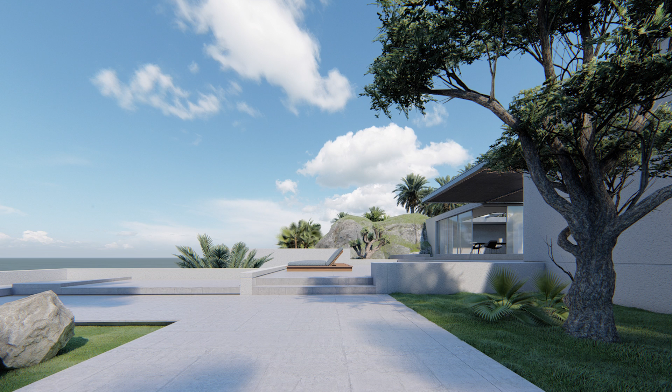So this is the final image, and it was really honestly very quick to make. I think this was 2-3 hours from not understanding much about Lumion to getting here.

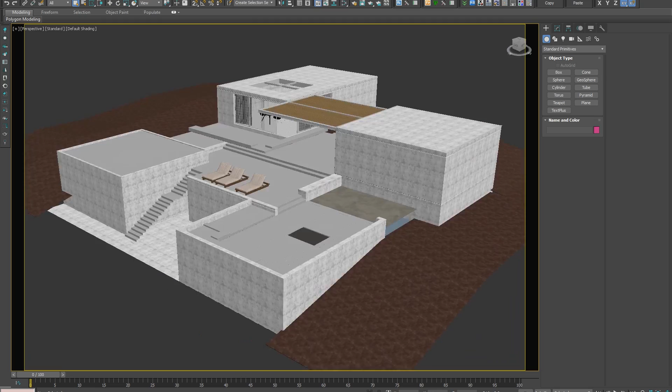Okay guys, so here we are with our 3D model, and this one was done in 3ds Max, and again you can use SketchUp, really whatever 3D program you prefer. Great thing about Lumion is that you can actually bring in the 3ds Max model directly into Lumion.

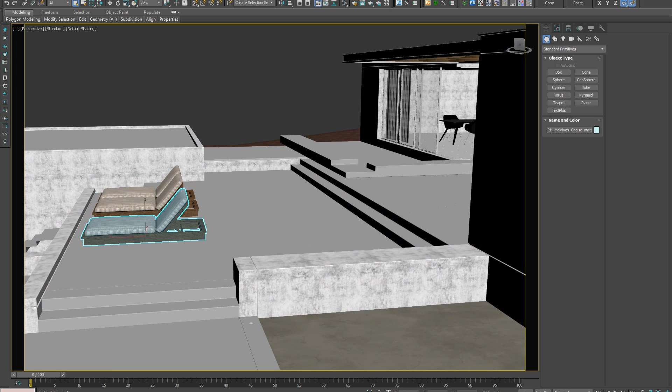This was modeled by one of our team members, Danny, and it's just a very simple model, and we knew where we wanted the cameras to be, so we didn't really go into too much modeling too extensively, and we've just put in our simple furniture because I think Lumion's library is not great.

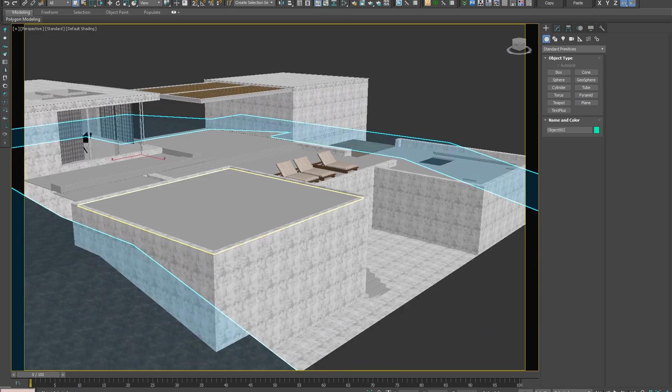From what I've seen online, I've seen some really nice tutorials as well in regards to Lumion. Everyone tends to bring in their own furnishing, so if you have any problems with the surfaces and they're not showing up, just shell them, and I find that brings them in. We also separate it out by materials. I know SketchUp can do that, and pretty much all other programs, and basically Lumion just interprets those.

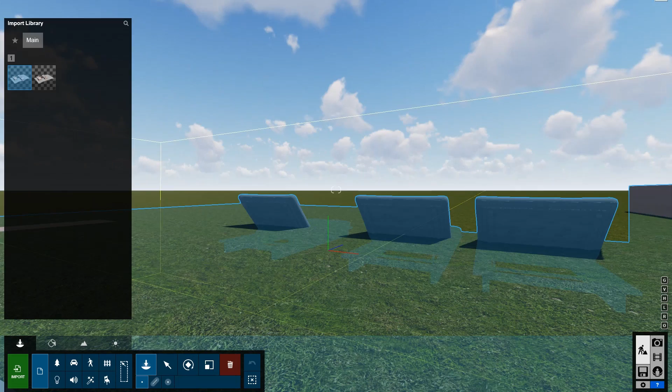So let's kick this off into Lumion. So here goes, and we've started our Lumion project, and we've basically brought in our model.

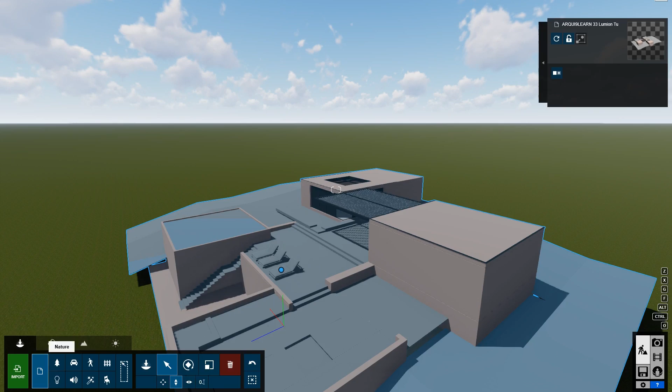I'm going to be narrating a little bit of this, then I'm going to be making some pauses, and you can just enjoy the process. This one we haven't actually sped up too much, so you should be able to see how everything works. Please keep in mind, this is also a learning process here with what we were doing, and when I was trying to learn this, but it's so quick and intuitive that you really start to understand.

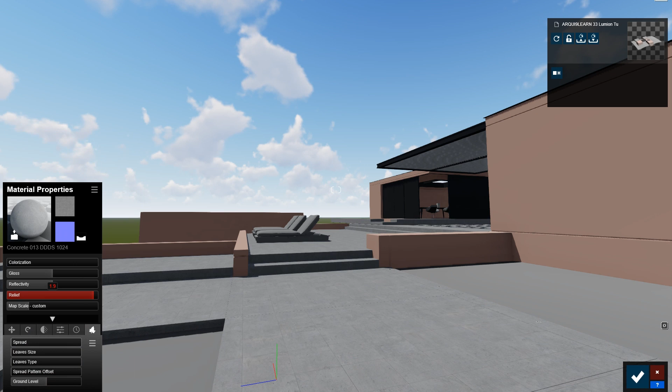Now, as you can see, I've delved in straight away into just getting the basic materials. This is very similar to the workflow of any project that we work on. So we'll start with our basic materials, just getting everything set up. Now, I knew already more or less where the camera was coming from, so I knew it was about this direction.

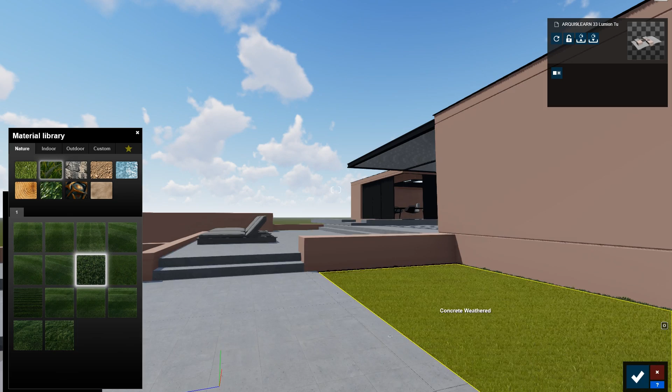And I'm just getting into understanding what is what, your basic grass, your basic concrete, stucco, things like that. It's so quick and intuitive just to choose those materials. Again, Lumion is divided in such an easy way where it has the materials, it has the environment, and it has the lighting. You'll see as we go through that.

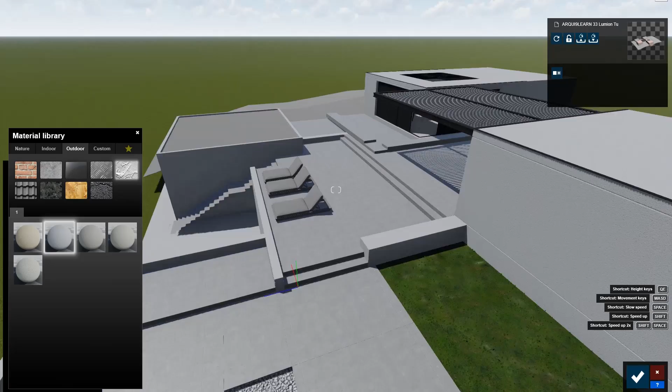So again, just testing out a little bit of what materials should go where. Again, this was a very open brief, and I was trying to understand it as I went along. I thought this could be kind of a rock pool where we'd have some flames coming through. I really just wanted to make something quite pure, white, and essential. It really didn't go too complex, and we wanted to see how photographic we could really get it to be.

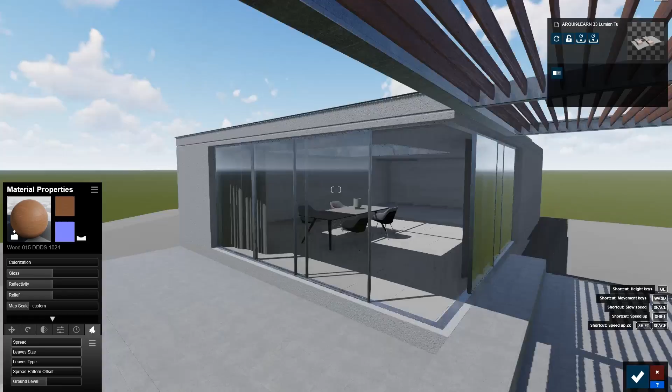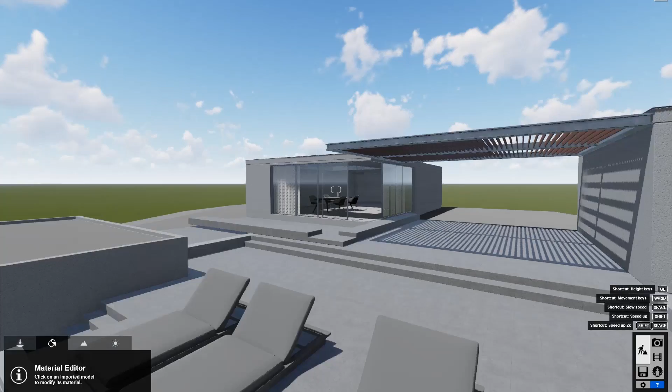So another great thing about Lumion is the capacity to basically see what you're doing straight away. You really get a feel for where the light is coming, how the light is going to be, how the textures are going to react, how the reflections are going to react. And especially in this latest version, 9.02, it's fantastic because you can really get global illumination, where in the shadows you have light that reflects off walls and things like that. It's really amazing to see straight away what you're doing.

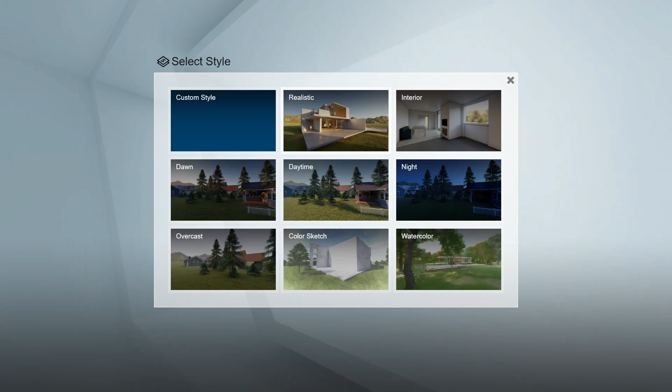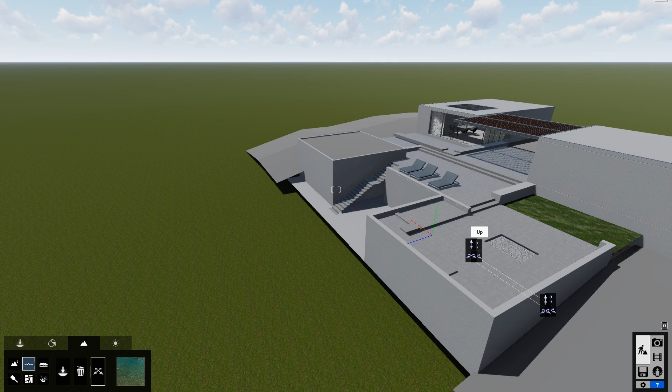The way that we've used it, and the way I'm using it at the moment, is just to work as a rendering engine basically—bringing in everything, but it textures and lights and does everything else. It's super simplistic. You saw we just went to the camera symbol, clicked on realistic, and it already sets everything up. That controls the camera, so your cameras are then stored there.

Now I'm just trying to understand how water reacts, and you can draw your own pools, or if you don't have a water plane. It looks really nice—water is something that's super hard to achieve really well, and I think in these real-time engines it doesn't look bad at all. You get the caustics, that filtering of light through the water where you see those ripples.

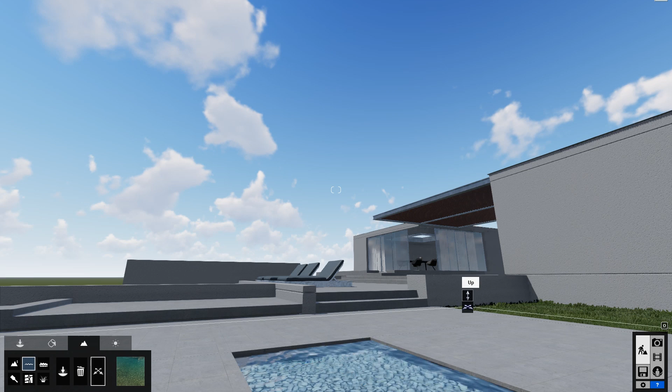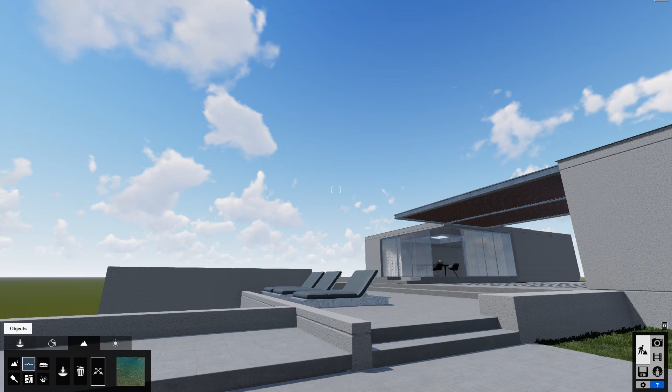As I went along, I was just saving various works in progress, and you see you can also render super quick. The one thing about Lumion is you really have to have a strong, really good graphics card, a good processor, and a lot of RAM. I think we're using a 1080 Ti, GTX Ti, on this, so it's super quick and runs really well. But yeah, it is super intensive.

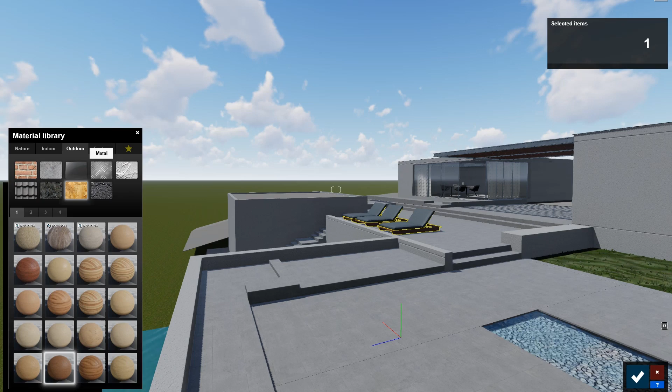So again, just sorting through all the materials, trying to get that balance of all the materials working, and testing out that water. In the end, I saw it really didn't work.

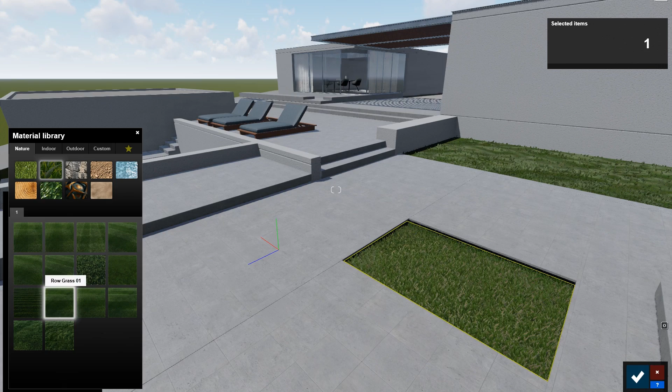The controls are kind of just like a video game—W to go forward, S to go back, A to go left, D to go right, and then you can go up and down with Q and E. It really just reminds me of playing a video game, which is great.

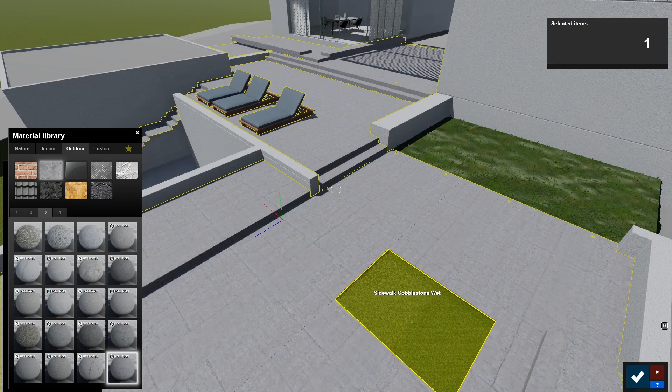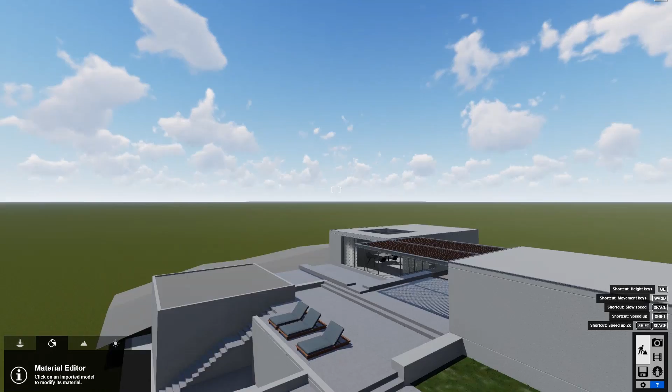It's so fast and intuitive, and you can adjust the textures. Once you select, you go into your texture tab and just select the geometry. Again, it groups everything from Max that has the same texture, and you just double click the material and it applies to what you're using. Then you can adjust the roughness, the reflection. It's really quick and intuitive—honestly, it's such a breeze.

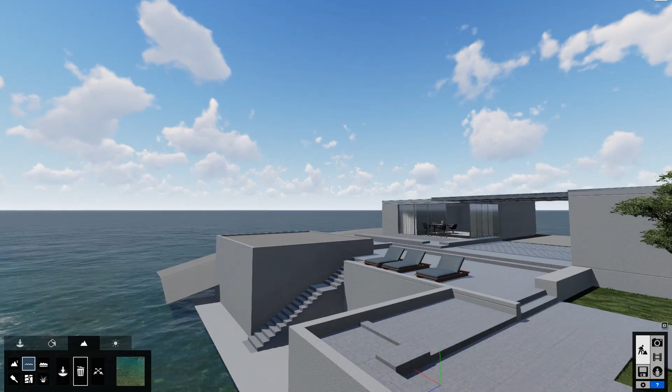And now just going into the entourage. This is the next step where we start to look into the entourage and figure out what's going on with the environment around. I switched that to water, and it just looks amazing. It's not so much about this being a deserted island, but I wanted to test and see how it looked and develop all these environmental things. As I more or less knew the camera we were going to have, I didn't worry too much about it. Now just experimenting around—are we going to make it sand or not? I think I kept it sand for the time being.

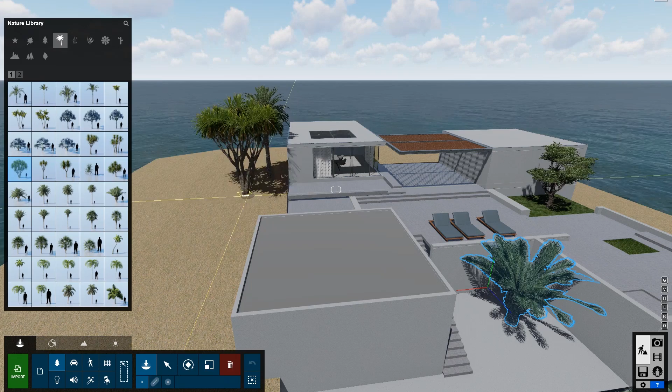Then I think the trees are one of the greatest things about Lumion, especially if you're an architect and just want to quickly populate something. It's fantastic—you can really get that diversity, and I think they look great when you render them. Again, in post you can always add a mix of both post-produced 2D trees and 3D trees.

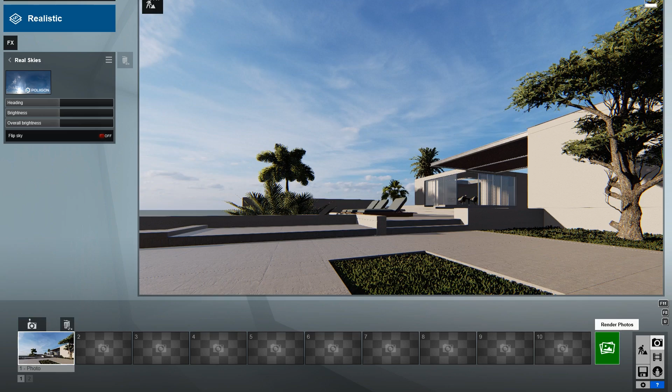And then, as you can see, I'm experimenting around with the lights. Now you have this thing called Real Skies, which has Poliigon skies, and they're absolutely amazing—it just makes the image look very photorealistic.

You can see the shadows, the color, everything is really nicely done. You can even go into dusk shots, and at one stage I really start to experiment with that. It's just great, you can see already it's coming out super well.

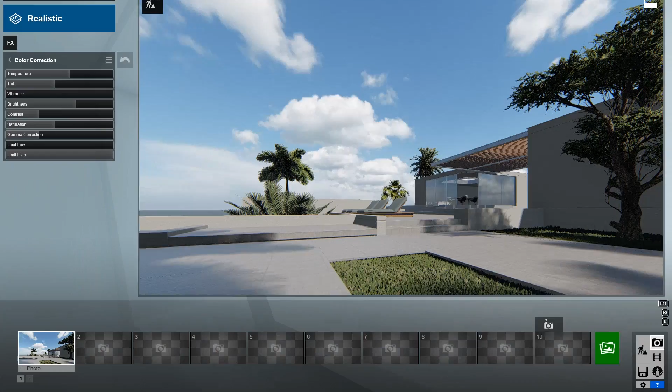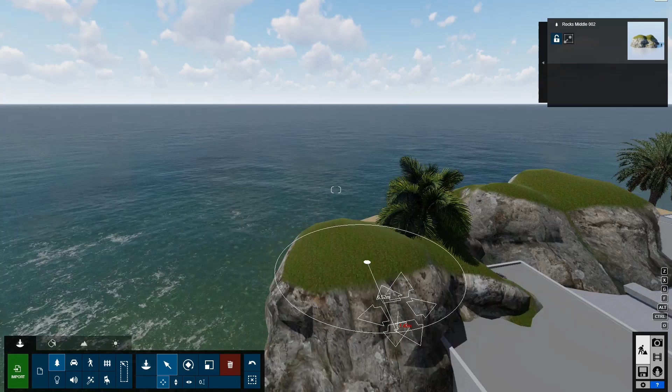I don't have much experience in this, so I'm just testing out all these various things, the library, the entourage, the textures, the lighting, and it's hyper quick. Even these small mountain blobs, let's call them blobs, I'm just inserting those in and testing them.

This is, again, I love diving and everything, and surfing, everything connected to the sea, so naturally I always go to these types of subjects. I'm just adjusting these to really fit the image and get a good understanding of the composition, and just moving these objects around quickly is fantastic for that.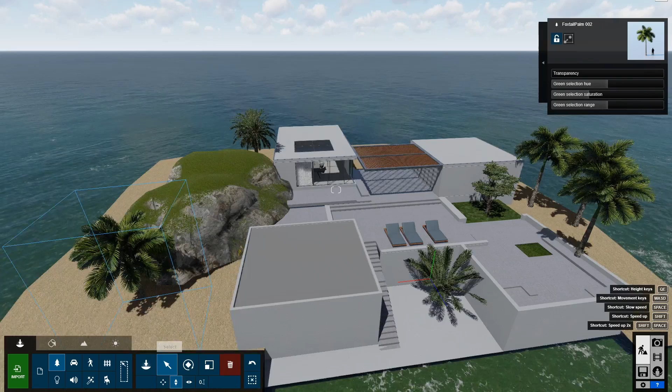I really think Lumion is a great tool, especially for architects. It won't substitute what visualizers do, because you work on a different level, huge master plans, things like that, and you need to have some flex, and there's various technical elements. It won't substitute that, but it is fantastic to get quick concepts out.

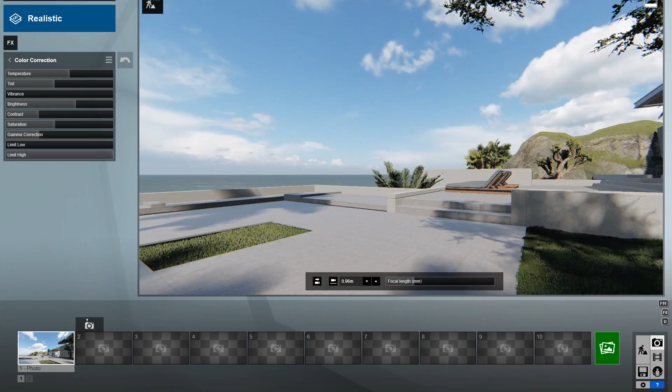Even testing the camera, you can see just how good it looks just in the main viewport. When I'm looking around in the camera with the lighting, it just looks really amazing, really fantastic. And it just kind of fills you with ideas to do quick concepts, it blew me away how fun it was.

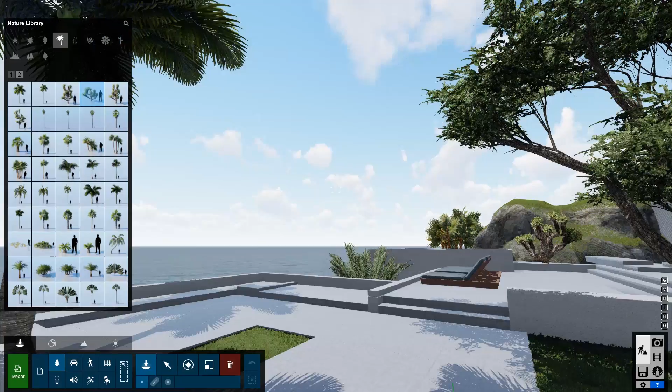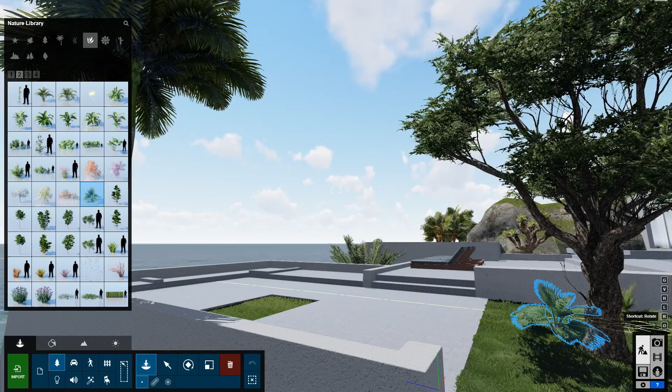Now that I've sorted more or less the entourage and the plants and the trees, they're pretty much all there, I'm just refining. But I tend to go to the next step where it's more about refining that lighting. I do try and test out a few different lightings, but I ended up just going with a simple daytime lighting to test this out quickly, and just different elements of the entourage, rocks and things like that.

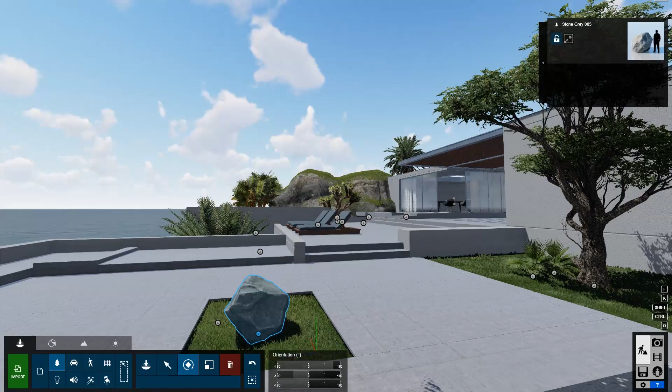And I haven't even used any scattering elements, so where you can put large surfaces and just scatter. You can just choose the surface and scatter various trees, and it will basically click and rotate those trees.

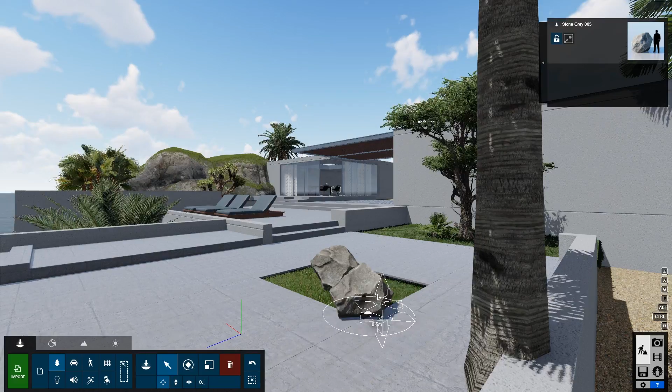On the right, if you look, when you have something selected, just above the camera symbol, on the lower right, it gives you all the shortcuts for the keyboard. And if you just hover over it, it actually tells you what it does. That's fantastic, I find that super intuitive and really nice of them to include. You've got a million shortcuts for all the programs you use and you tend to forget, so these ones really help out.

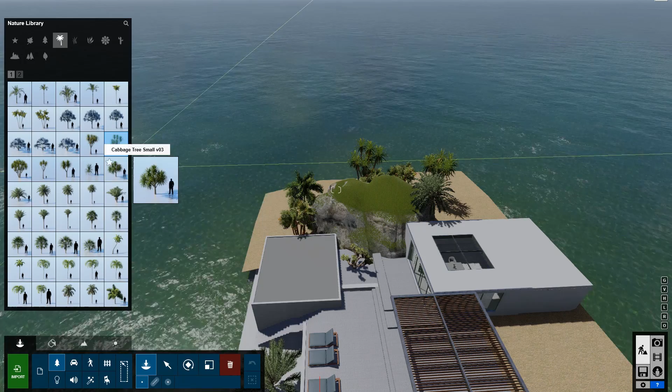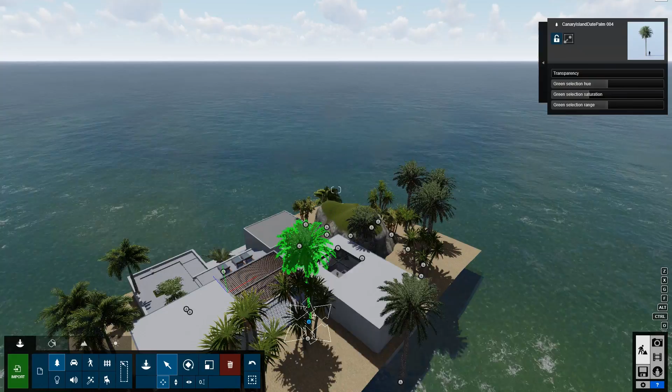Now that we're getting there pretty much, everything's coming together more or less. Again, this could be much quicker, you just have to remind yourself this was probably my second or third time using this and really looking into it, and it's just so hyper quick and intuitive.

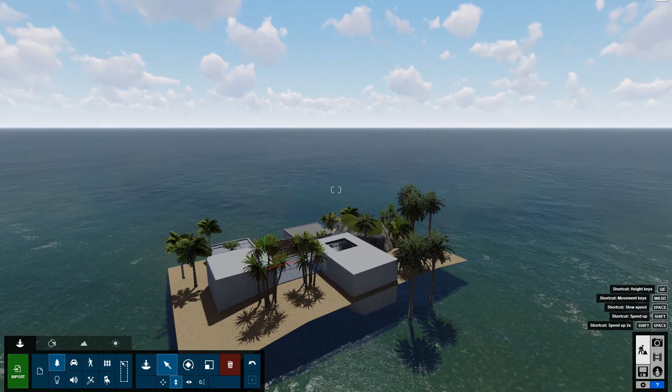Just moving things around compositionally to see how it works, if it's popping in that background. I already had the idea of what I wanted to do for the image, so it'd be a beach on the right, and I kind of thought this could be a surf villa.

Just saving out and rendering as I go along. You'll notice, yeah, once again, go to the realistic, the real skies, and I started to test out some different types of moods, trying to understand different types of lighting.

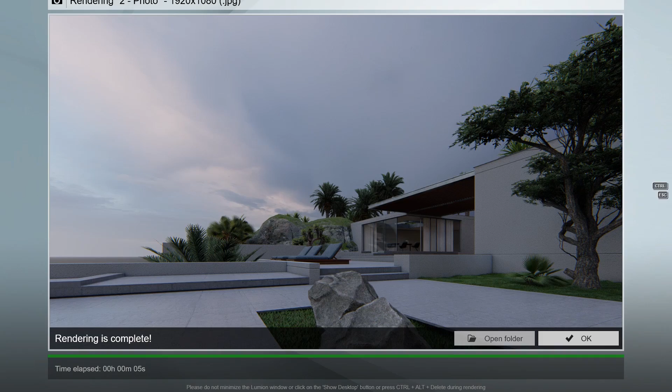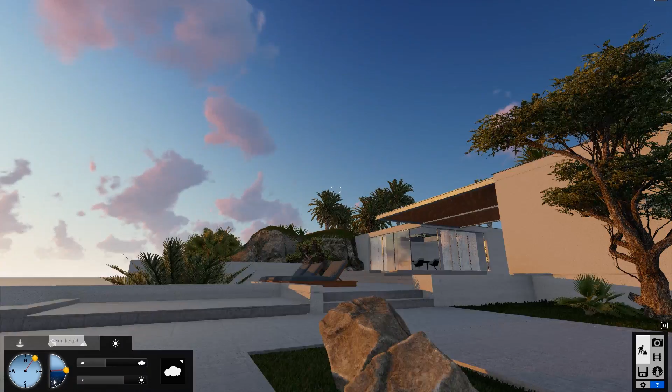Now, I really feel that the lighting is great, but I feel that it's very contrasty. And I feel like, at least in the trees and things like that, you should be able to add a little more reflection so it doesn't go so dark, because there's a big contrast between light and dark. I think in 3D programs you have this global illumination, so you have the sky, and you can kind of pump that up, at least in Corona, so you don't get such dark contrasty things.

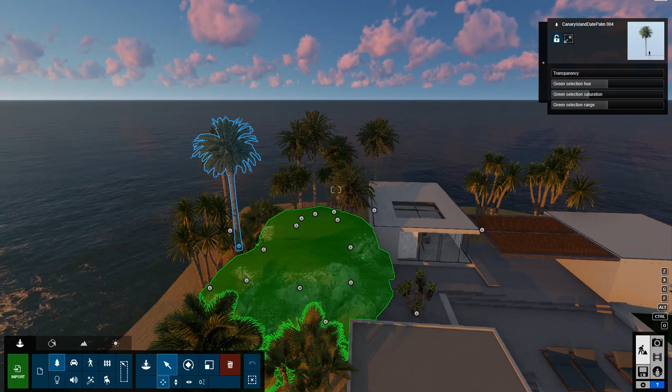I think something about it is missing in that aspect. I know you can go around with skies and pump up the sky intensity, but I found that it was just too contrasty, that it needs a little more smoothness, a little more in the colors, not so sharp between the darks and the lights.

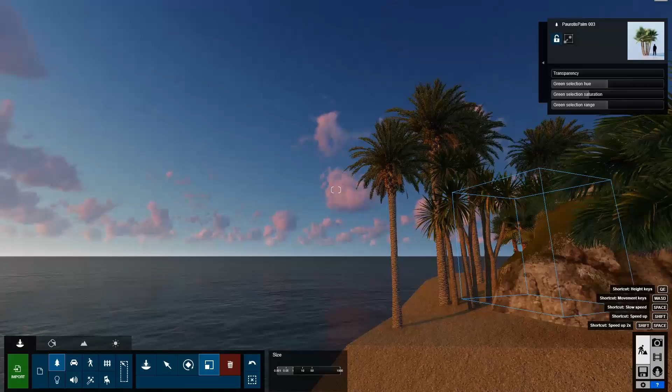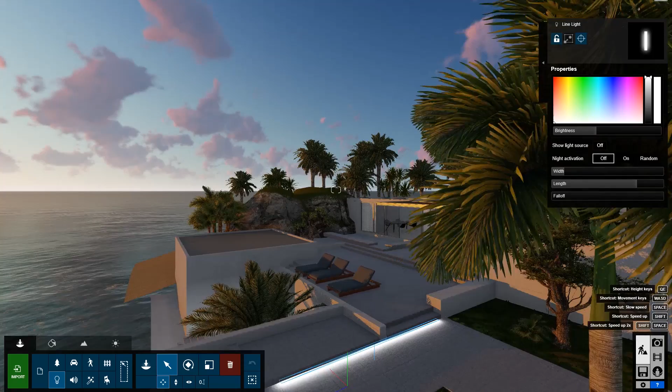Just trying to place some lights and trying to understand how these lights would react. It's just, once again, so easy to put these in, and it kind of snaps to the edge of the geometry, so that when you put something up against a wall, it just knows where it is and snaps it to there.

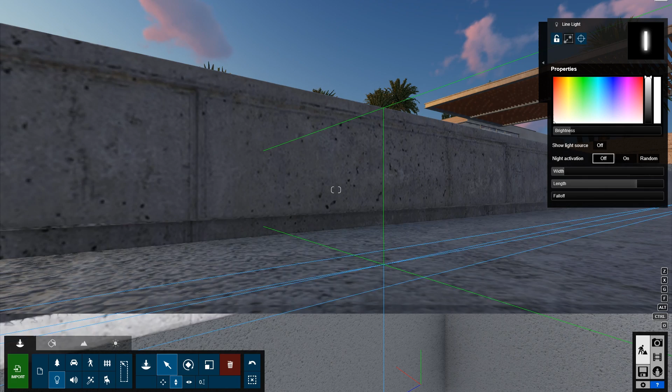You notice it could have used some finessing. At least it was snapping a bit more. I wanted to put it just underneath that step, and I wasn't able to. Now, I'm sure there is a way to do that, but it wasn't anything immediate.

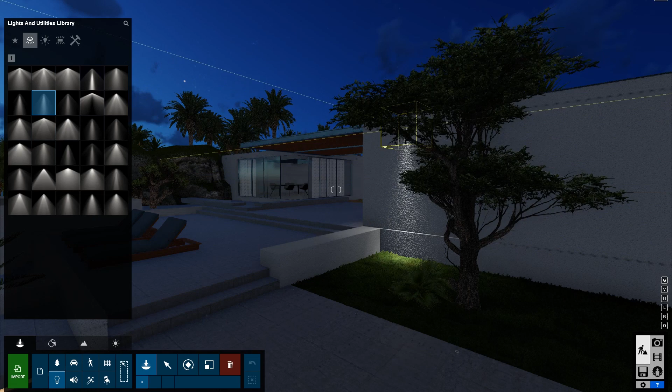Again, you can shift the color of the light, you can shift the intensity, you can shift the fall off. One thing to keep in mind is that I'm previewing this at night, so if you go to the sun, you can preview it. But one thing I learned is that then you go to the camera and it's whatever camera you have set up. Again, light elements, just to test some IES lights, see how those work.

And I found it was pretty good. Really, really good. Just saving as I go along, just testing those out.

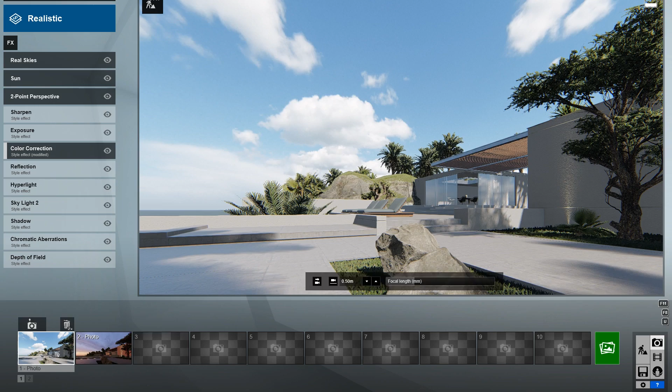You see what I'm saying with the, when you go back to the camera, that you've got the stored camera, but yeah, it doesn't show up necessarily in your preview mode when you're working on it.

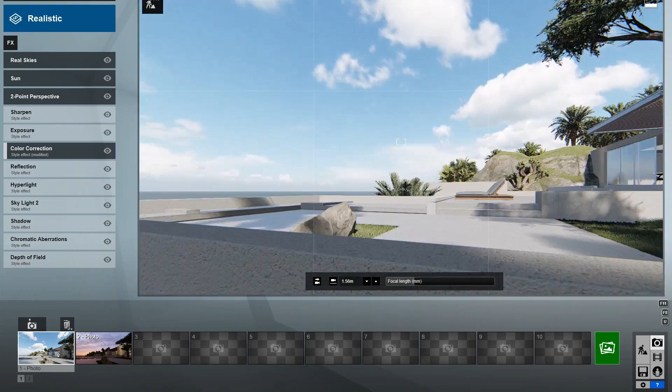But I found with some time, it really has a lot of potential. It is especially fun to work on and come up with quick concepts. I wish this was around when I was in uni. I would have gotten a lot better projects shown, because it's just so powerful and intuitive, and I wouldn't be spending so much time learning a software. It's really, really nice.

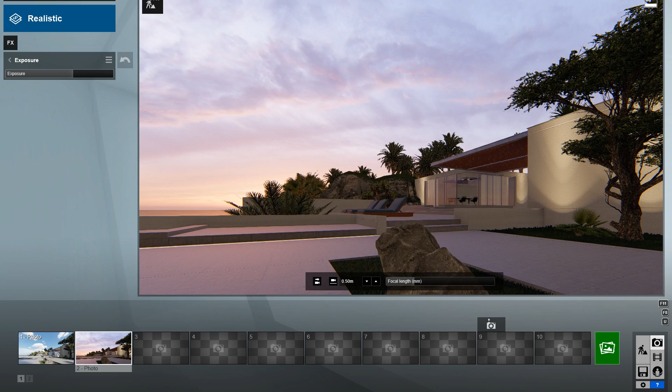So I've kind of decided already on where I'm going with it, but I just wanted to show you guys this little bit, because these were tests that I did just to test out the various types of light and how quick you can get to these moods just by changing around those real skies that are provided by Polygon.

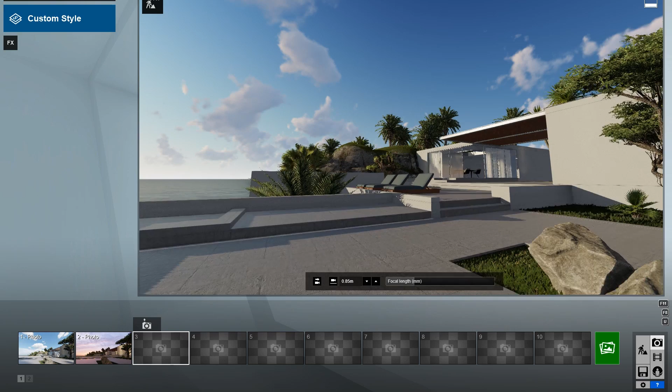Also testing out this time with global illumination, and what I talked about, using the skies that come from Lumion that are not the real skies, and the sun, which you can adjust similar to Corona's light mix, very, very similar in a different way, where you can adjust the sunlight and also the shadow, so you can pump up those shadows.

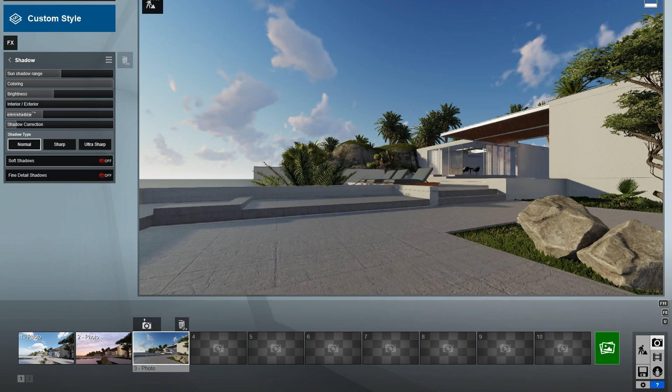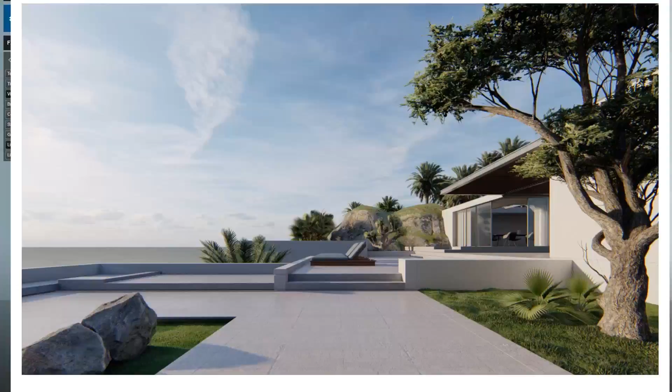So we are getting to the final part of this tutorial, where it's just about the refinement, understanding how much we were going to refine this, and seeing what the sunlight was doing, the color of the sunlight I wanted, doing various tests and exporting those tests, and really just manipulating those final little bits. You can see we're just really at the end, and this wasn't too distant from what we went through.

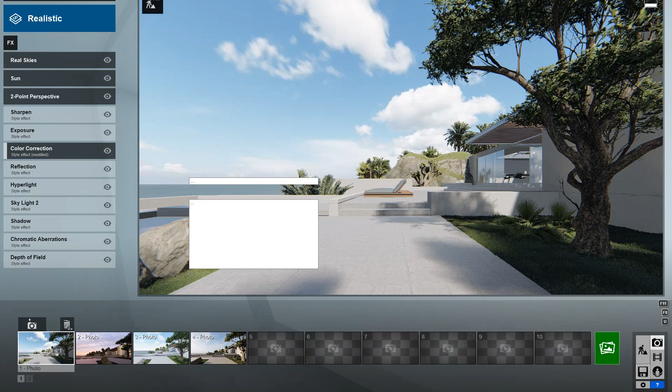Again, just a straight on shot, trying to have those verticals all aligned and nice. And there we go. We render it, and it's super quick to render. And then it's just the final rendering where we saved out, I think it was like 7,000 pixels and something. Switch on all the passes and just render that and get that ready to go into Photoshop.

Then we're on to my favorite part of the process, which is the post-production. Now, this is especially fun, of course, because it was just swapping out a backplate and kind of matching the two together and adding a little bit more.

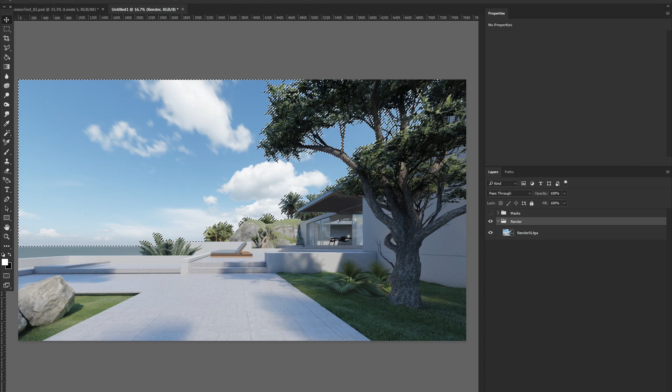We're not going to go too much in depth to this. It's been explained in other tutorials, and I wanted to do something really quick, especially for an architect. You just want to create something relatively quick with a few adjusts. So that's what I did, just thinking, okay, I'm in a firm and I want to get this out very quickly to show my boss or something.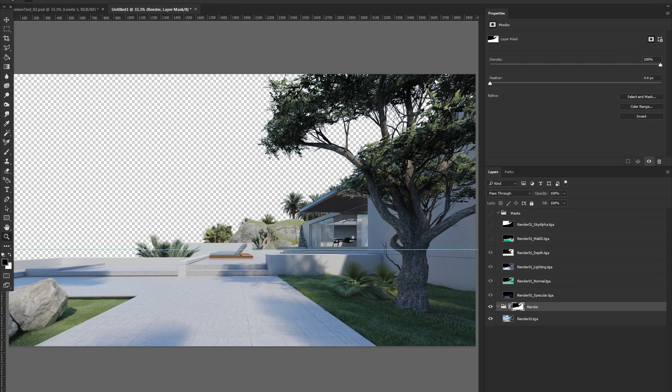And yeah, just looking through the various Photopacks we have. Again, don't forget to check them out online and you can download them. But yeah, just finding something really nice. I think this one is specifically from Sri Lanka, if I'm not in error. And basically, I just wanted this very tropical palms, and I'm contrasting the actual render.

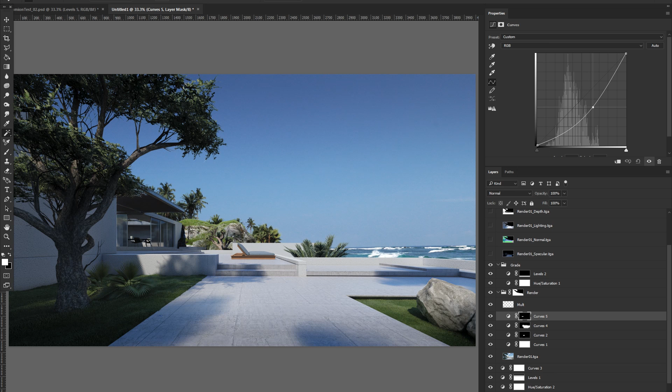I've separated out the alpha mask from the background and foreground, and I'm bringing those two together, adding a bit of information and contrast. I've just skipped a couple of things, nothing too much, just contrasting and building your eye for understanding what needs to be there. How you can see the glass, I've darkened that because I think glass isn't super reflective. One thing I see a lot is very bright glass, but glass, while reflective, depends on how it reflects, and it can also be quite transparent in cases where you have a very dark background.

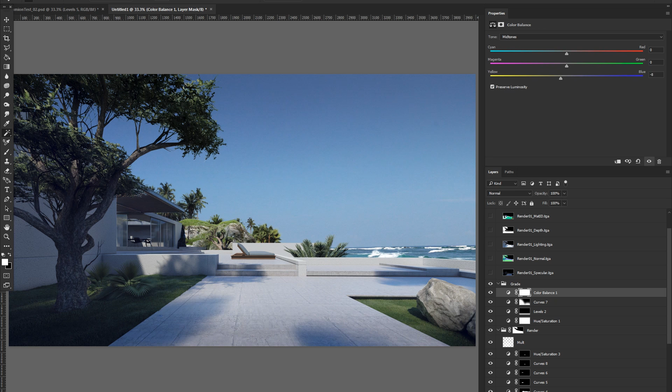And just adding a little bit of the grade, so you see it's divided out by render and grade, and just bringing elements like the chaise longue to be a bit darker so all the colors come together. Nothing special at all.

This is the one thing I wanted to show about Lumion: it's just like any other render engine. There's no secret to it. It's really simple, and with a bit of post-processing, you can really achieve some great results.

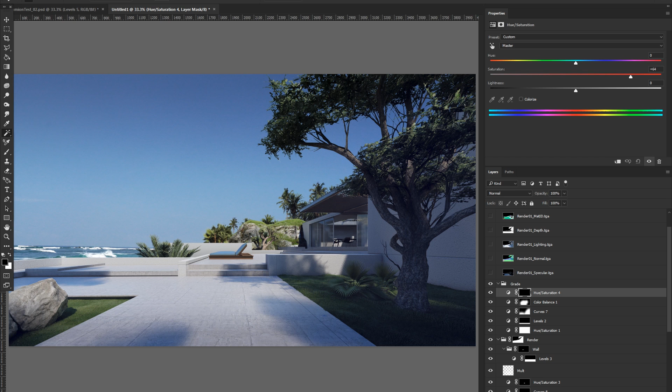Now I worked through this a little bit more, not a whole bunch more, but basically we came up with a really nice concept of this surfing villa that you can see on screen. This is really the final product that we came to, and it was a lot of fun. I hope you guys enjoyed that little bit.

Now on to the conclusions. I think Lumion is a great tool - I really love it, it's fantastic, but not without its negatives as well. So I want to talk a little bit about the likes and dislikes.

What I really like is that it's super intuitive. It's very quick to set up and very easy to use. It's a fantastic tool - I can imagine it being used by architects all around, students, whoever. It's super easy to get set up and create something really nice and really quickly. I think this is the big main point of it.

The dislikes: I think the library, although great in trees and things like that, is lacking in furniture. We could use a lot more furniture, rugs, things like that to populate scenes - items that are more design-like and a bit nicer. I also think it would be good to have some controls for forests, like Forest Pro and scattering tools in 3ds Max.

I'd like to see something around that with a little more control. It would also be great to have more control over the light and colors and how things work. And moving objects about was great, but I at least wasn't able to find shortcuts that lock movement to certain axes. So there's a lot of stuff there it can build upon.